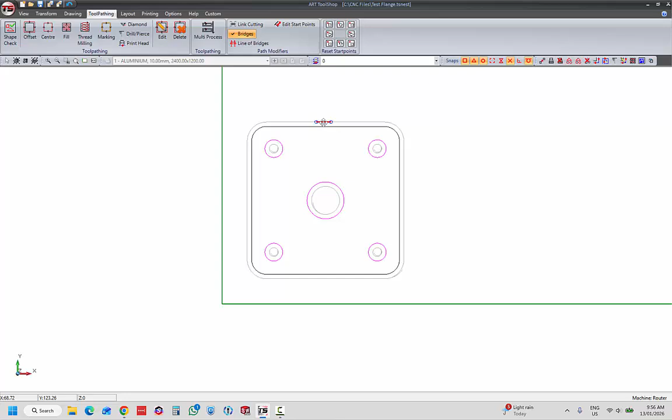If you're routing or milling, choose 3D bridges. With 3D bridges, you can set the ramp angle up and over the bridge, and also the amount of material left at the bottom of the cut. You can adjust the bridge length for both 2D and 3D bridges. Once you're happy with the parameters, click OK. Now you're in bridge mode, and the cursor should look like a small bridge. Clicking on any toolpath will add a bridge using the parameters you selected. You'll see a thicker red line showing the location of the bridge.

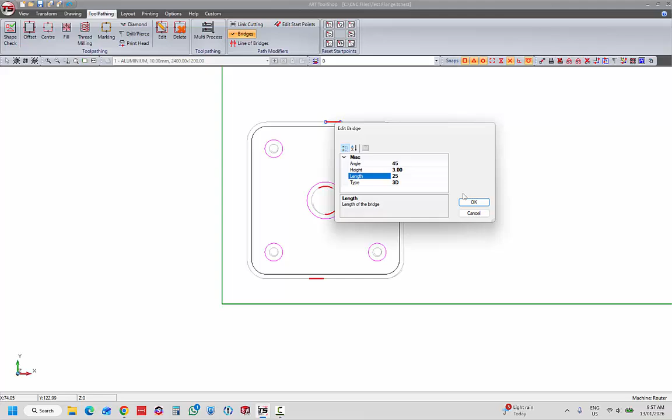To remove a bridge, right-click on it and select Remove Bridge. You can also adjust the parameters of an individual bridge by right-clicking it and selecting Edit Bridge. This allows you to change settings for that bridge only. You can also move a bridge. While you're in bridge mode, hover over the bridge and you'll see a dot at each end. Click and drag the bridge along the toolpath to a suitable position. Normally, bridges work best if they connect the part to a screw-down point, or if they line up with a matching bridge on an adjacent part. Right-click and select Cancel to exit the bridges function.

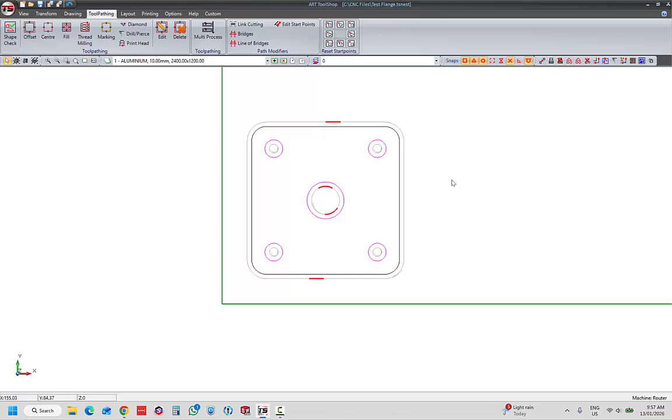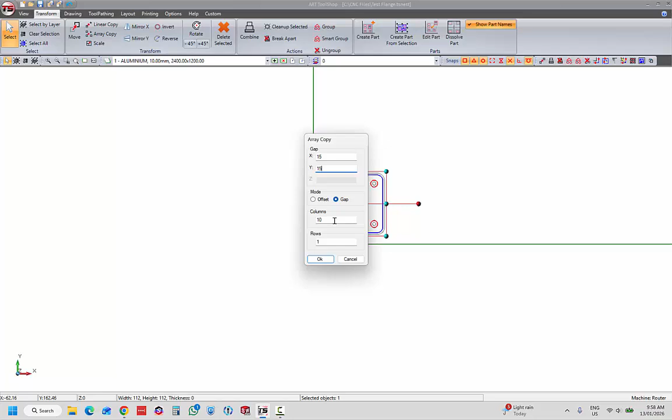I'm going to use the Ctrl+Z undo function so we can demonstrate the next feature. To do that, I'm first going to make a grid of 4 flanges. I'll select the original flange, then go to the Transform toolbar and select Array Copy. I'm going to specify a gap between the copies rather than an offset distance. Next, I'll enter 15 millimeters in both the X and Y directions. Then I'll choose 2 columns across and 2 rows high. Clicking OK will create an array of flanges with the correct gap between the parts.

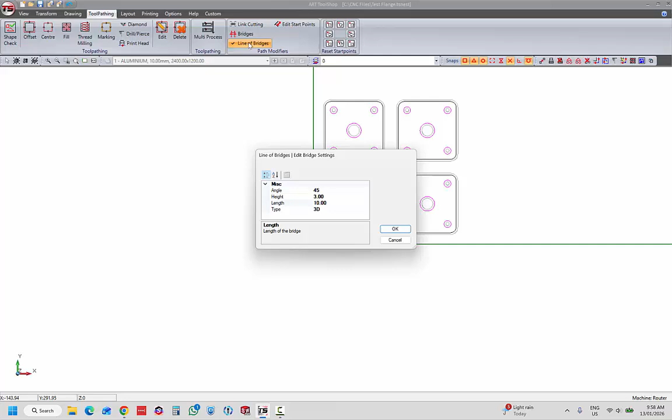A very useful feature that has recently been added to ToolShop is the Line of Bridges function. This works similarly to the standard Bridges tool, but it's great for quickly adding lots of bridges, and it's also great for aligning bridges between adjacent parts. Activate the function, make sure the bridge parameters are correct, click OK. Then click and drag a line across the screen. Wherever the line crosses a toolpath, it will add a bridge. If you drag the line across the gap between 2 parts, both parts will receive a bridge in aligned positions. Right-click and select Cancel to exit the function.

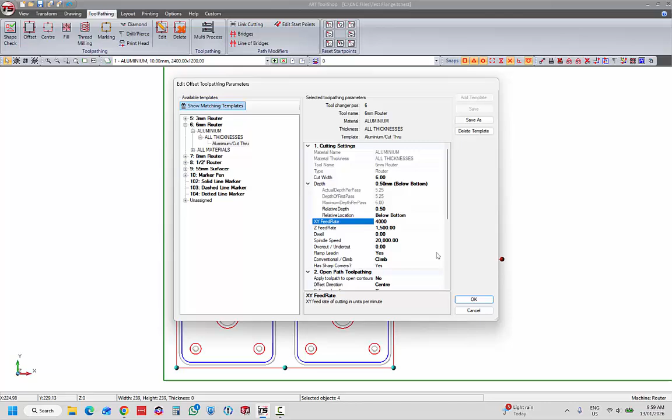A special feature of ToolShop is that if you regenerate the toolpath, it will recreate the bridges in the same locations, even though it is a completely new toolpath. To demonstrate this, I'll make sure the toolpath is selected. Then click Edit Toolpath on the Toolpath toolbar. For this exercise, I'll adjust the feed rate and regenerate the toolpath. You'll see the bridges have been re-added to the new toolpath in the same locations.

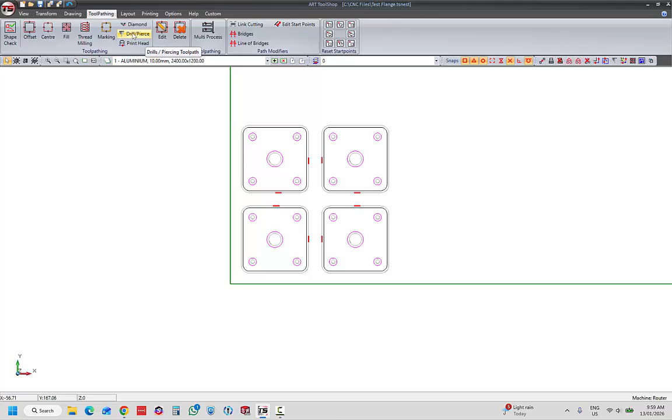Lastly, we'll add some screw-down holes between the parts. This is very useful for routing because parts can vibrate and move during cutting. Screw-down points don't apply to plasma or laser cutting. Select the Drill/Pierce function on the Toolpath toolbar. This is similar to the Offset Toolpath dialog we used in tutorial number 7. For this purpose, I'm going to use the default template for the 3mm drill.

I need to adjust the depth to go at least 3mm, or about 1/8 of an inch, below the bottom of the material to account for the drill tip. I'll also set the Z-feed rate and RPM to suitable values. There are settings for peck drilling as well, but I'm going to ignore those for the moment. If I had circles selected, I could click OK and it would place a drill point in the center of each circle. However, I want to manually place drill points around my parts without drawing circles first.

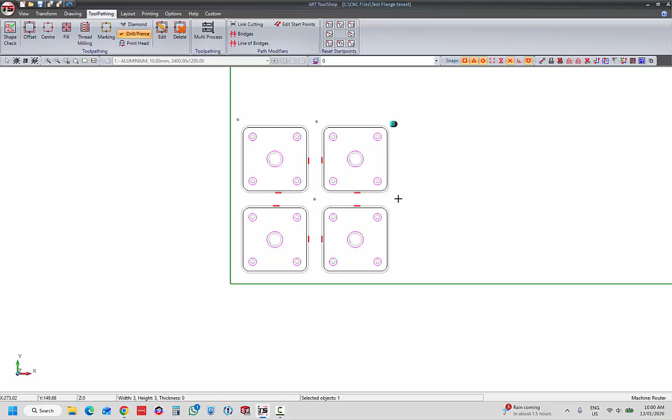So I'll click Place Drill Points and use the mouse to place as many as I like around parts and even inside holes to stop scrap from spinning or jamming against the cutter. When you have enough drill points, you can right-click and cancel out of the function.

So, in this short tutorial, we've covered moving lead-ins, adding and editing bridges, array copying, and the Line of Bridges tool. We've also learned how the direction of cut affects lead-in placement.